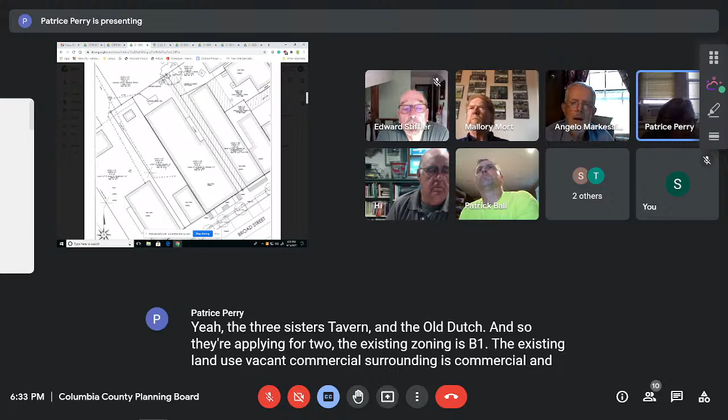So they're applying for 2 permits, the existing zoning is B1. The existing land use is vacant commercial. Surrounding area is commercial and residential. The structure is existing, approximately 12,834 square feet on a 0.13 acre parcel.

There are 2 special use permit applications. One is for the hotel inn, and the second is for the restaurant, referred to as the Old Dutch Inn and Three Sisters Tavern. The village code requires that multiple uses require a permit for each use type, that's why there's a requirement for 2 special use permits.

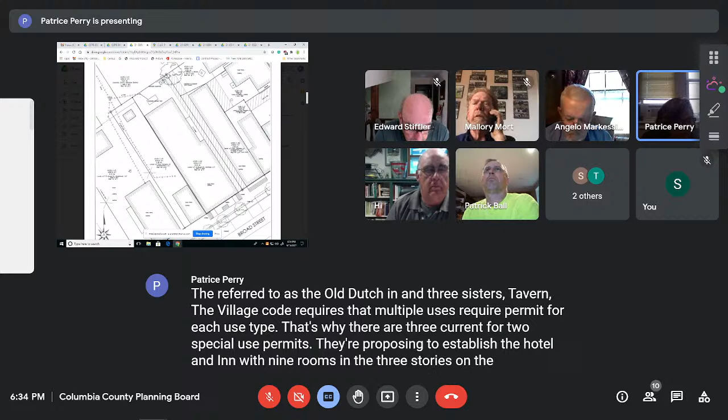They're proposing to establish the hotel and inn with 9 rooms across 3 stories on the 2nd and 3rd floors, and the restaurant, which will be 126 seats, partially in the basement and on the 1st floor: 44 seats on the basement level and 82 seats on the 1st floor level. The basement will include...

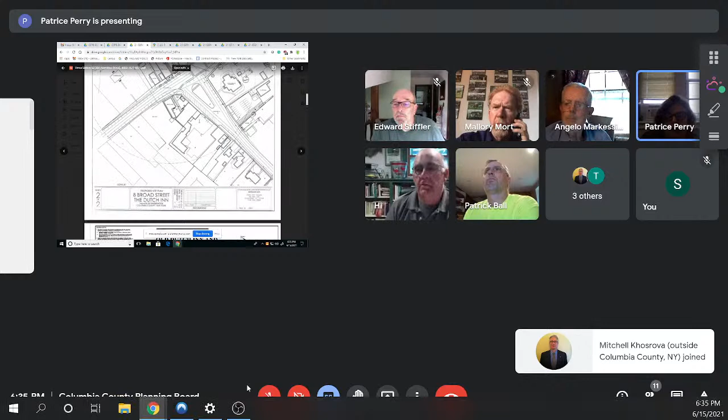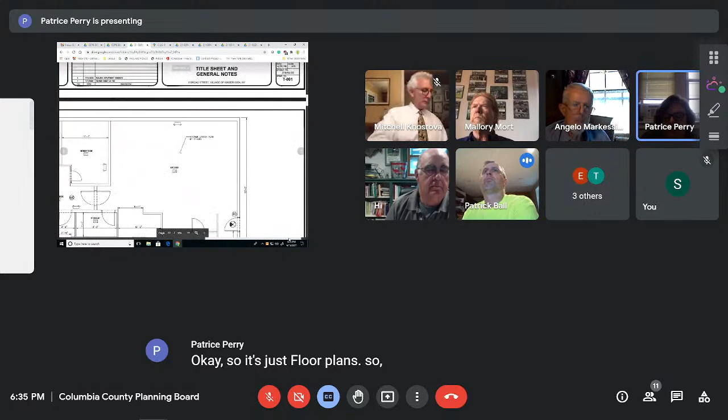Yep, there you are. Okay, so this is the floor plans. Let me get to this, this is the first floor plan. So the first floor will include dining, reception, game room, restroom, the kitchen, and storage.

The second floor... actually this is the basement. The basement will include the bar lounge, restroom, and storage - see the storage is in the rear. The second floor will include 5 guest rooms and storage, and the third floor will include 4 guest rooms and storage.

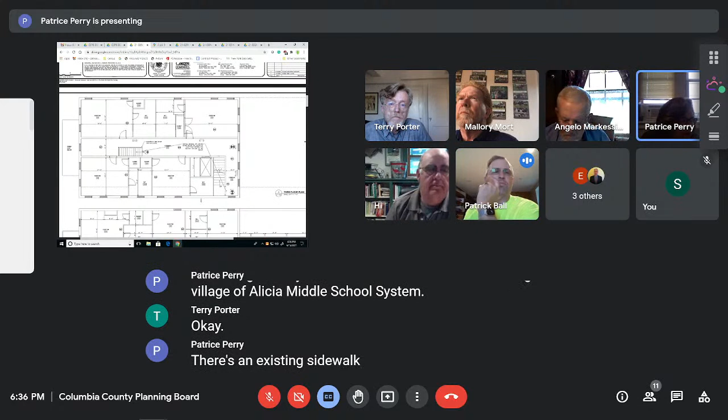They're proposing connection to existing sanitary sewer. It's the B1 sewer district through the Village of Kinderhook municipal system. There's an existing sidewalk on Broad Street that was removed and replaced, and because part of it is in the DOT right-of-way, it required DOT review, approval, and a permit.

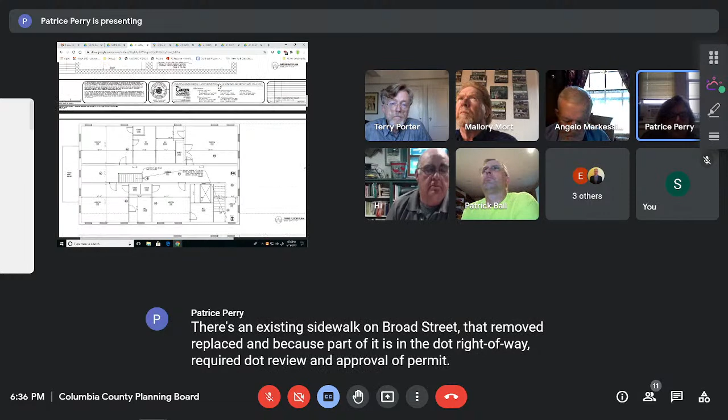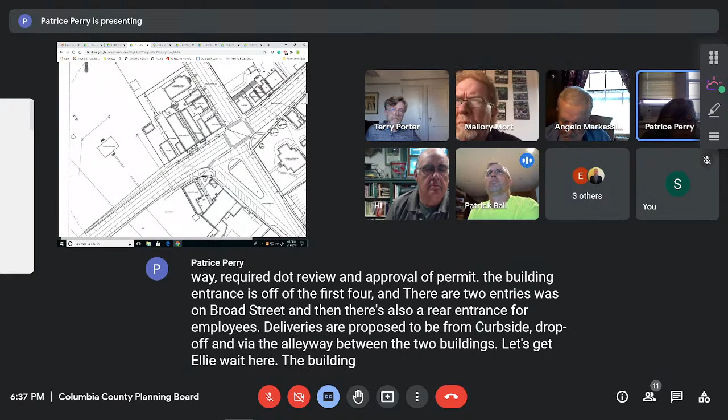The building entrance is off of the first floor, and there are 2 entries: one is on Broad Street, and then there's also a rear entrance for employees. Deliveries are proposed to be from curbside drop-off and via the alleyway between the 2 buildings. Let's get to the alleyway here. The building renovations include roof gutters, upgrades to the HVAC system, and interior work.

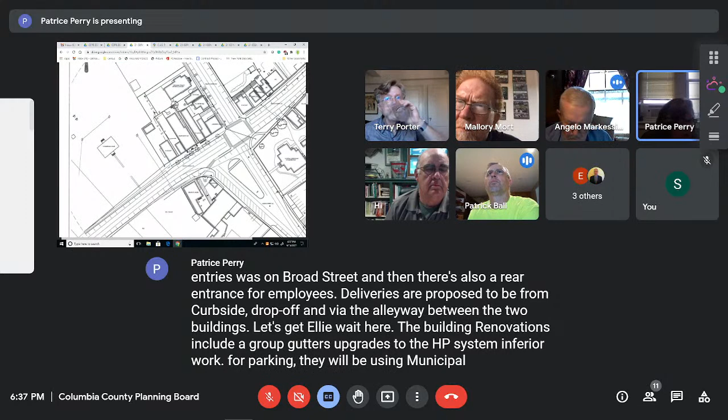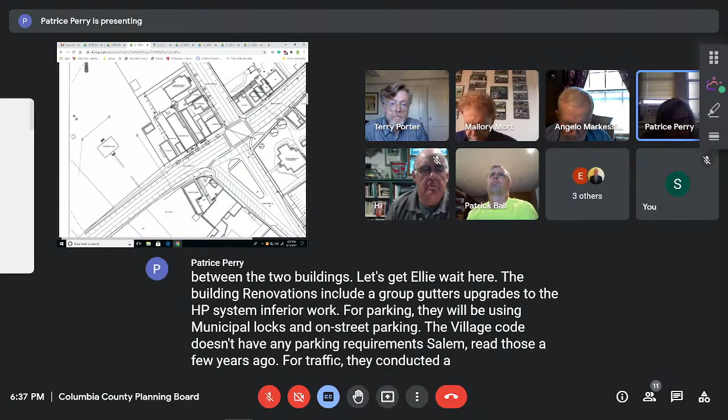For parking, they will be using municipal lots and on-street parking. The village code doesn't have any parking requirements; they eliminated those a few years ago. For traffic, they conducted a peak hour trip generation analysis and identified that the peak time would be weekday evenings and Saturdays, estimating 40 additional trips generated on weekdays and 48 on Saturday.

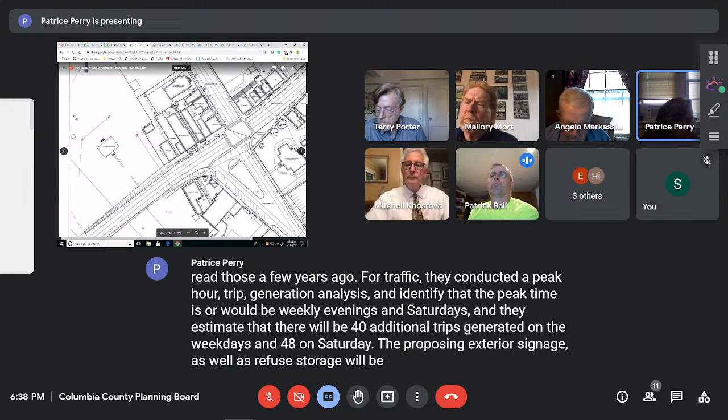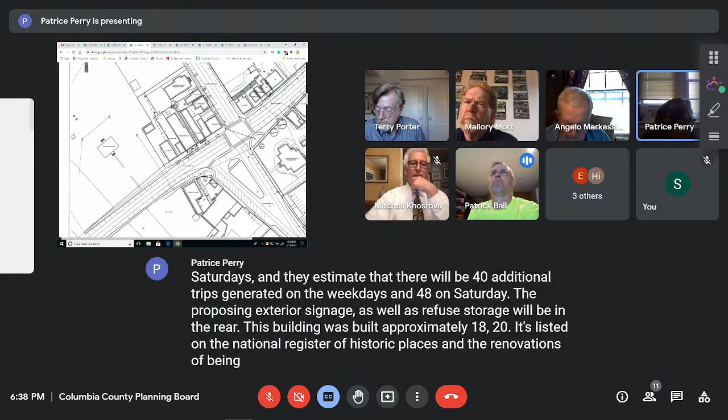They're proposing exterior signage as well as refuse storage in the rear. This building was built in approximately 1820. It's listed on the National Register of Historic Places, and the renovations would be in accordance with the standards for the treatment of historic properties. We didn't find countywide impact from this.

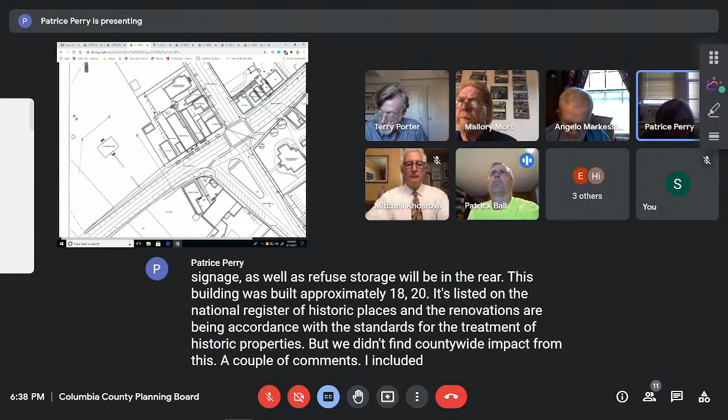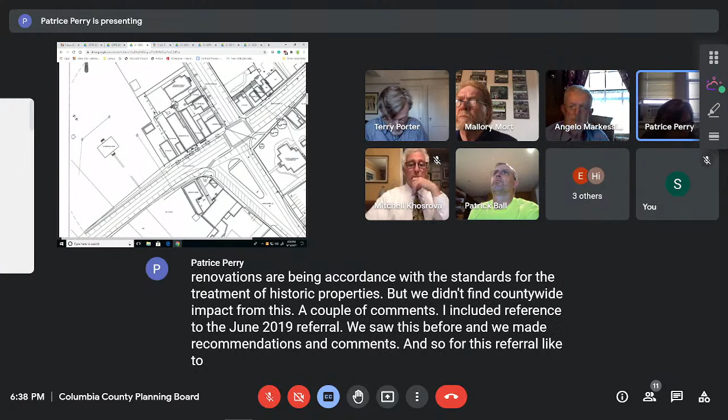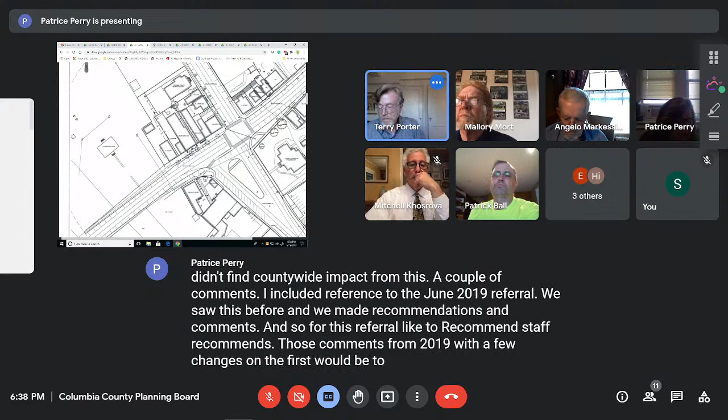A couple of comments. I included reference to the June 2019 referral. We saw this referral and made recommendations and comments. So for this referral, staff recommends those comments from 2019 with a few changes. The first would be to revise comment number 2, which references a correction that was identified as needed on the environmental assessment form, and that no longer exists.

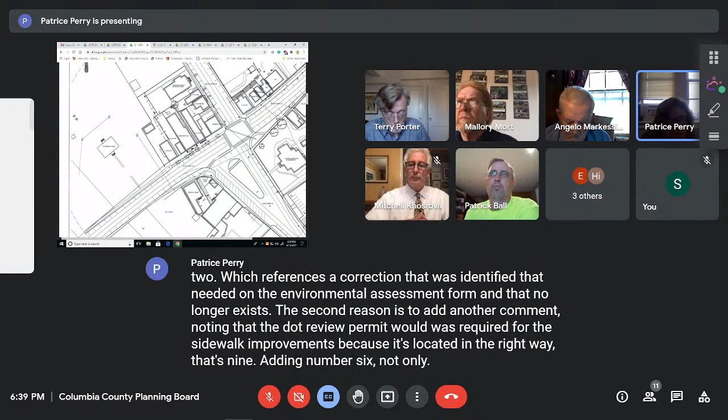The second revision is to add another comment noting that the DOT review permit was required for the sidewalk improvements because it was located in the right-of-way of US 9. Adding number 6, noting the numerous public letters of support for the project that were included in the referral.

And then a revision to number 3 to read as follows: restaurant and inn, noting that the historic structure has sat vacant for a period of time and has been an inn and restaurant in the past.

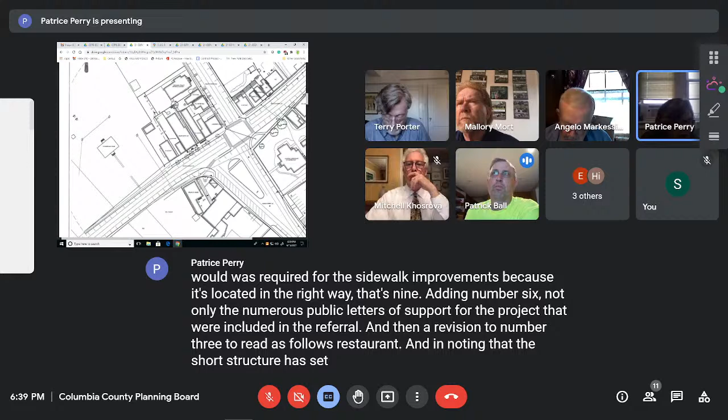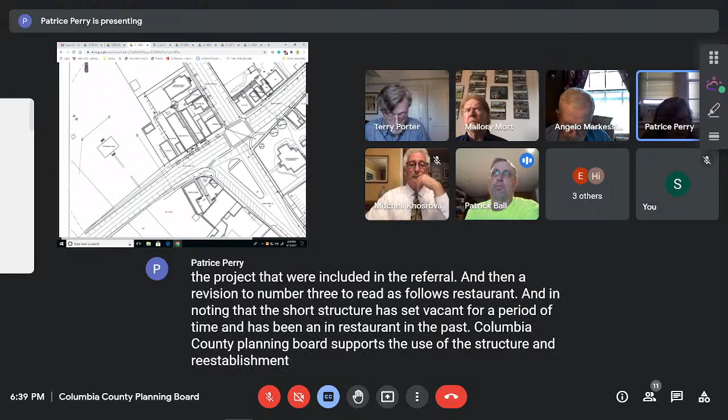Columbia County Planning Board supports the use of the structure and the reestablishment of these historic uses and notes the positive impacts to the village square that will likely result when the structure ceases to be shuttered and vacant.

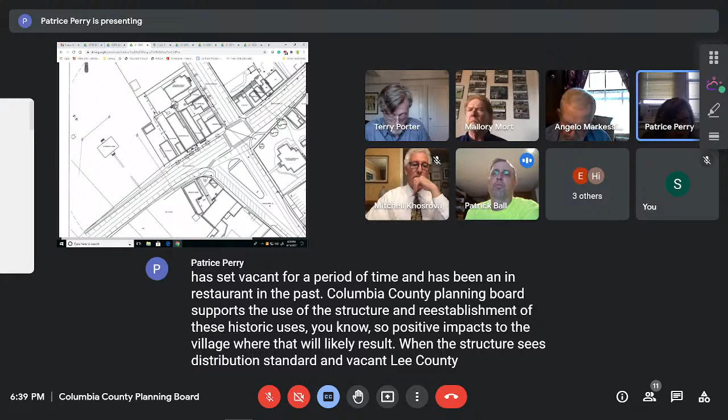Columbia County Planning Board recognizes the efforts of the applicant to honor the history through renovation and rehabilitation in order to maintain the existing fabric of the street.

It's anticipated that the new establishment may once again serve as a private anchor in the village and also serve to complement the other growing businesses that contribute to the vitality of the village.

Is that it, Patrice? That's it for me, yes. Okay, for now.

Mitchell Khosrova would like to make a few comments to the board, and as has been our policy in the past, we've always entertained and encouraged people to attend the meetings and to offer comments.

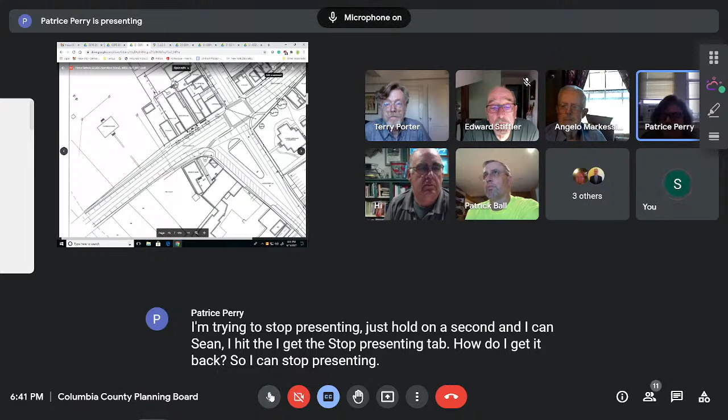Yeah, I'm trying to stop presenting. Just hold on a second. Sean, I hit the stop presenting tab, how do I get it back so I can stop presenting? I'd like to stop so that person that wants to comment, so Mitchell can comment. I'd like to stop presenting so we can see him. I hid those, I hid them. No, I can't get them back, because they kept popping up and getting in the way of the work. There you... but I can't see you guys. Oh, no. Okay, okay, I have you now. Okay, I see what happened.

I'm sorry. Hello, Mitchell. Hello, good evening. Thank you all, Patrice, thank you for all your responses from the beginning. I appreciate the board giving me an opportunity. I will be very, very quick.

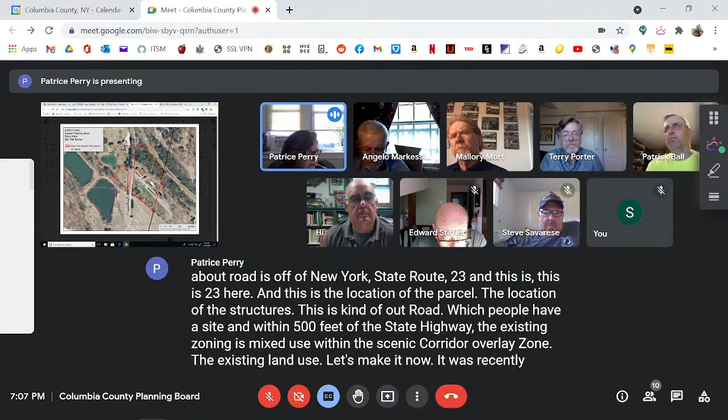The surrounding area is residential and commercial and the ski area. And this is the boundary between New York State and Massachusetts here.

The site plan review is required for the proposed improvements to an existing restaurant and lodging use. There's an existing inn with a restaurant and lodging. They had 12 guest rooms, and they're not planning work on the guest rooms with this application. The inn building is proposing improvements for code compliance as required for the kitchen, restrooms, entrances, and the outdoor dining area, landscaping, pedestrian access, and adding a sprinkler system to the second and third floors.

Oh wait, sorry. That's as large as I can make it. I apologize for that.

As I mentioned, the existing access is from Catamount Road off of 23, and there's also secondary access from Nicholson Road, which is seasonally maintained and is accessed through Massachusetts.

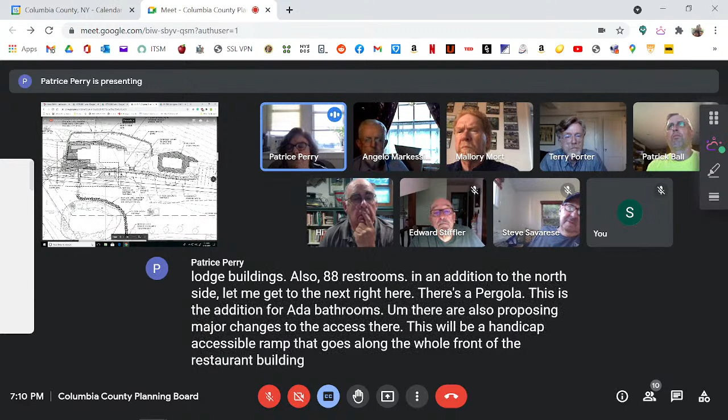They're also proposing major changes to the access. This would be a handicap accessible ramp that goes along the whole front of the restaurant building and down past the pool to the parking area, which will now be valet parking.

They're proposing to add non-slip pavers around the swimming pool, and also a path here through the woods that would be 3 feet wide. There's also a proposed pathway here that will take you over to the ski area, connecting to a wooden footbridge.

There will also be bollard lighting installed throughout the project. You can see all the little lights here along the pathways. They're not proposing any upgrades to the utilities.

As I mentioned, the parking is being reconfigured right now. When you pull in the road, you park here along the property edge. Now they're proposing, because of the ramp, they have taken over part of that, and they're extending out a lawn area here in order to accommodate this handicap ramp. So there'll be some parking alongside of that, and then this newly created valet parking area over here. It will be double stacking in this parking.

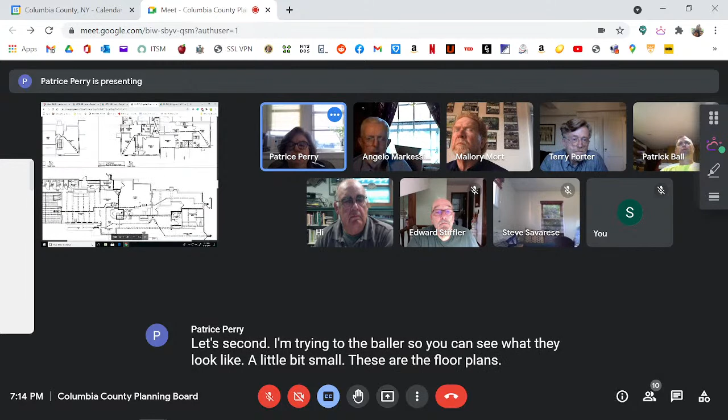These are the floor plans. So there's a bit of reconfiguration on the interior.

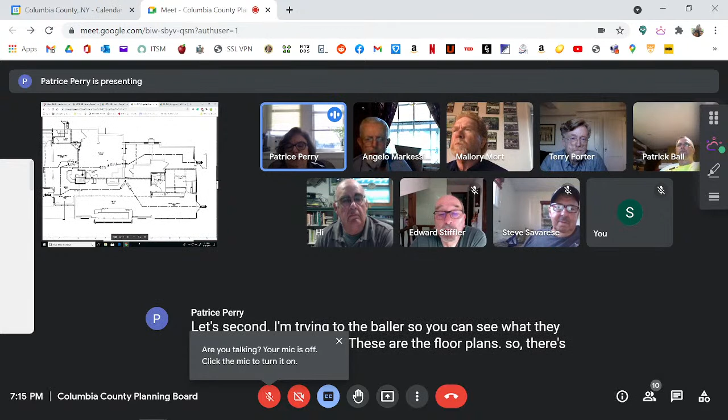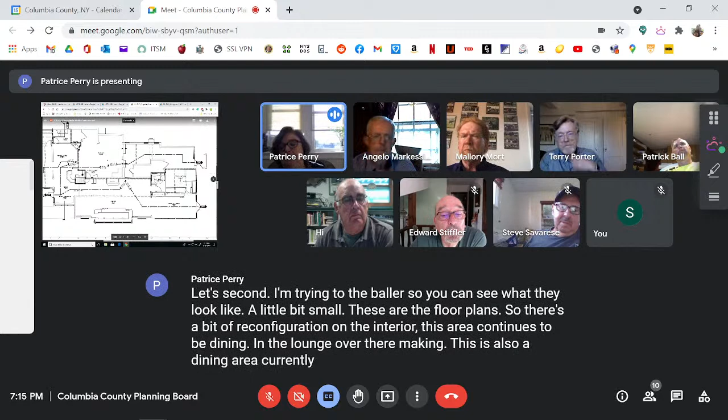This area continues to be dining and the lounge. However, this is also currently a dining area - they're converting that to an office and luggage area. And the kitchen remains in the same area.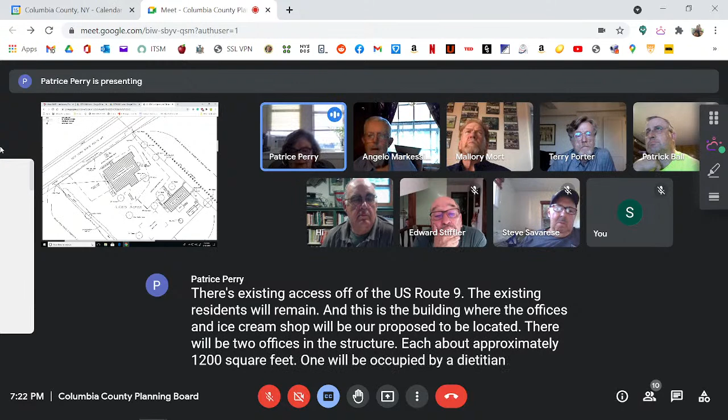There will be 2 offices in the structure, each approximately 1,200 square feet. One will be occupied by a dietitian, and the second tenant isn't identified in this application. The retail ice cream shop, takeout only, would also be in this building.

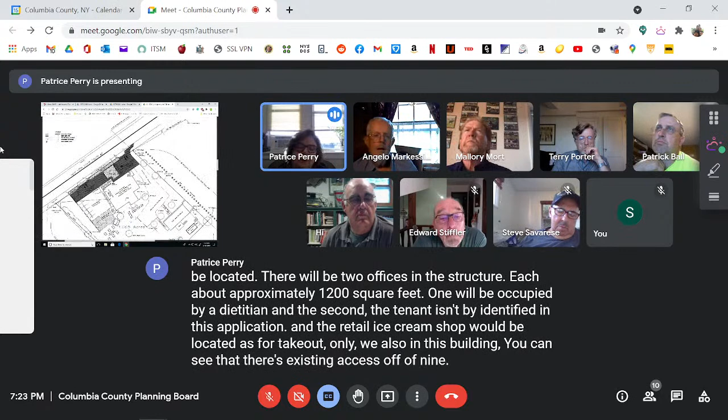You can see there's existing access off of 9, but they are proposing improvements, adding 2 driveways with controls to manage access, using curbing and a concrete island here.

They're also proposing the addition of small picnic tables in the back, and this is the location for the refuse storage area.

They anticipate employing 4 people in the offices and 3 at the ice cream store, with hours of operation for the office being Monday through Friday 9 to 5, and for the ice cream use Tuesday through Friday 4 to 9, and Saturday and Sunday 12 to 10.

There's an existing well and septic system for each structure. There's an existing freestanding sign along Route 9 that will be replaced in kind, and proposed wall-mounted lighting in this area and in the front.

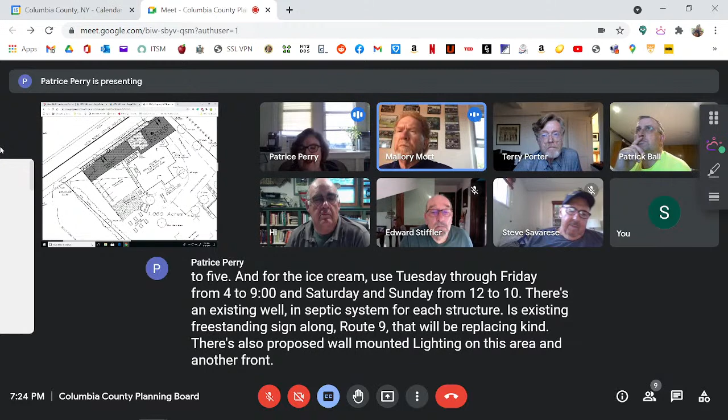An ag data statement was submitted because the property is within 500 feet of active farming operations.